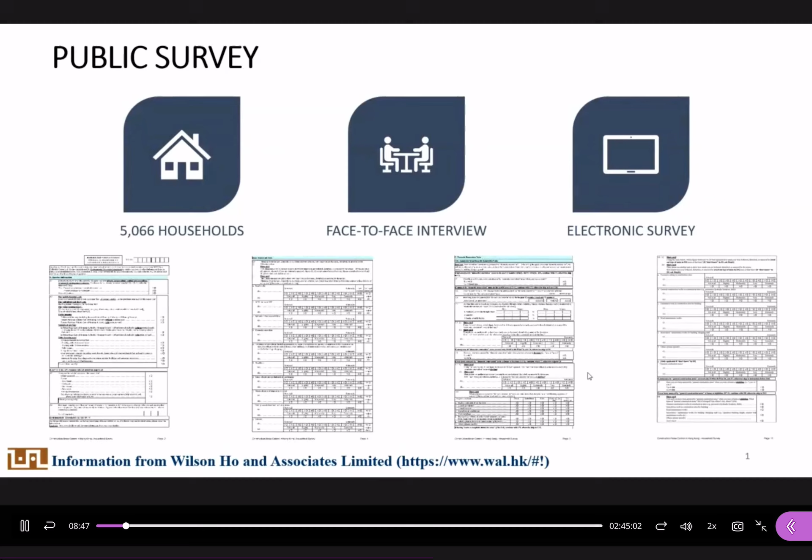Let's take a look at that. After their study, they found that noise is concentrated during the daytime, not even at night. Normally we make campaigns during the daytime, not at night.

And noise from domestic renovations is more annoying than general construction work. For general construction work, because we have stringent requirements to control the use of power equipment and the time durations we are allowed to use it, but for renovations, we don't have such stringent requirements.

If your neighbors want to do renovations at home, it is so annoying, and we want to control them. Normally they can do this from 9 o'clock in the morning up to 5 o'clock in the afternoon, so outside this period you are not allowed to do this, and it induces a large number of complaints. The final results found that the property management company could be a good channel to manage those renovation noise issues.

This is the comparison results - this is for domestic renovation and this is for general constructions. You can see the light green one is 'not annoyed'. When you refer to this pie chart, you can see that more than 60% could feel annoyance under domestic renovations, but compared to the same situation for general constructions, only 40%.

This chart shows the percentage of populations that could feel annoyance under construction noise effects, such as percussive piling and general site activities, road maintenance, demolitions - mainly during the daytime, not at nights. With the presence of property management, it is better to do control for domestic renovations, because when we receive complaints, this is a good channel for us to communicate with others. This is general information for your reference.

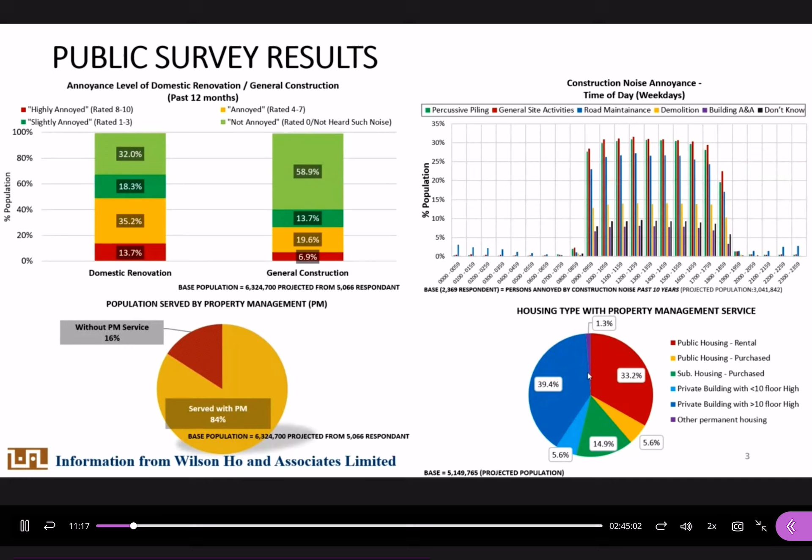If we have this noise permit, it means that we are allowed to do some construction activities. If we are not allowed to do so, it means that you cannot do that - it is illegal. We could not go through all the details about that.

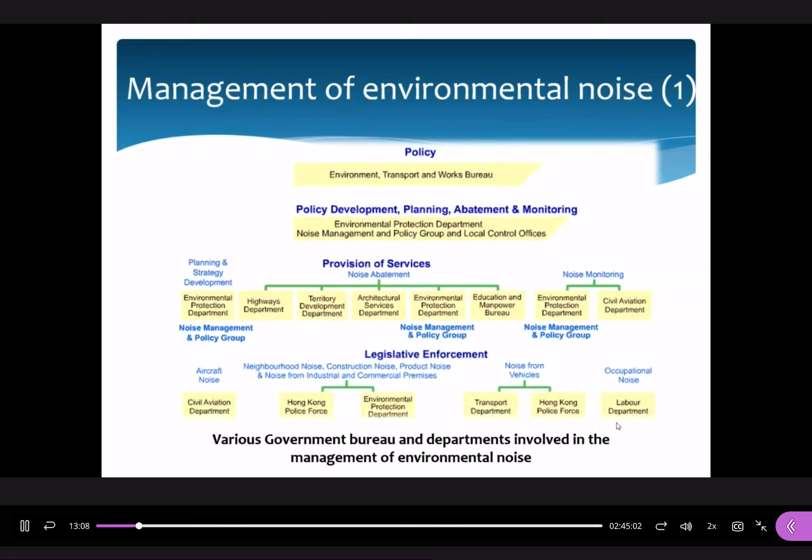I just want to share with you that in Hong Kong, normally we divide into two types. The first one is general construction work. In addition to that, we classify percussive piling work, and they have different requirements for general construction work and percussive piling work. In terms of the legislation, we could refer to the Noise Control Ordinance, Chapter 400.

Inside this document, there are many legal terms about how to define the noise effects and what kinds of legal requirements we need to follow.

In the descriptions of control, please pay attention when we want to use power mechanical equipment at night - from 7 o'clock in the evening to the next day, 7 o'clock in the morning, we need to submit our permits when we use this, when we want to use power mechanical equipment. But during the daytime, before this period, let's say at 5 o'clock in the afternoon, we do not need to apply for any permits to use the power mechanical equipment - just at night.

It is very stringent. We need to have very solid justifications, and we even need to provide very good provisions to reduce the noise effects. Otherwise, the authority EPD could not approve your applications.

And for the piling work, in terms of the piling work, we still refer to Chapter 400 Noise Control Ordinance. At night, it is not allowed - even if you submit an application to the authority, it is not allowed, it is prohibited. But in the daytime, when we want to apply to use these machines, we still need to apply for noise permits, and there are two different types. I will let you know the requirements later on.

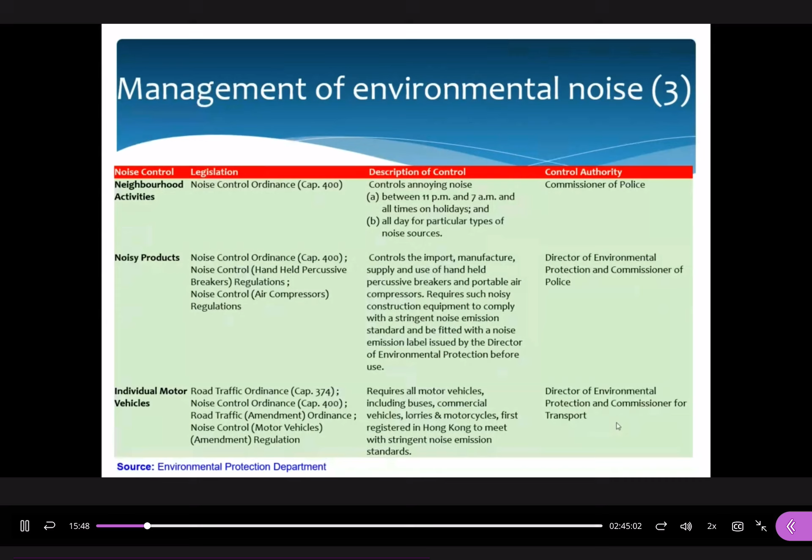In terms of the Noise Control Ordinance, it also refers to industrial and commercial activities, and laboring activities. For the neighbourhood activities, such as in the midnights, the control authority is the Commissioner of Police, not EPD. And the noisy products and individual motor vehicles, they have reference guidance.

And also the traffic management and intruder alarm system. For this one, intruder alarm system, what does it mean? It means those alarm systems inside buildings, for example, the fire alarm system - we have a specific sound level for this design. If the sound level is too low, it cannot alert people for evacuation in case of fire accidents. If the sound level is too high, it is not good. So that's why we have this one.

And the aircraft noise, it is regulated by the civil aviation department, not environmental protection department. For the BS standard, there are two parts: the first part is for noise and the second part is for vibrations. This document is the code of practice for noise and vibrations control, construction, and open sites.

There are some general control measures and suggestions at source. For example, we need to turn off unnecessary engines or switch off equipment where not required - it means we do not turn on all equipment at the same time - and keep internal haul routes well maintained and avoid steep gradients. This is to transfer materials inside construction sites, and use rubber linings in chutes and dumpers to reduce impact noise, minimize the drop heights of construction materials, and start up plant and vehicles sequentially rather than all together. When you refer to all these general requirements, there are some common sense.

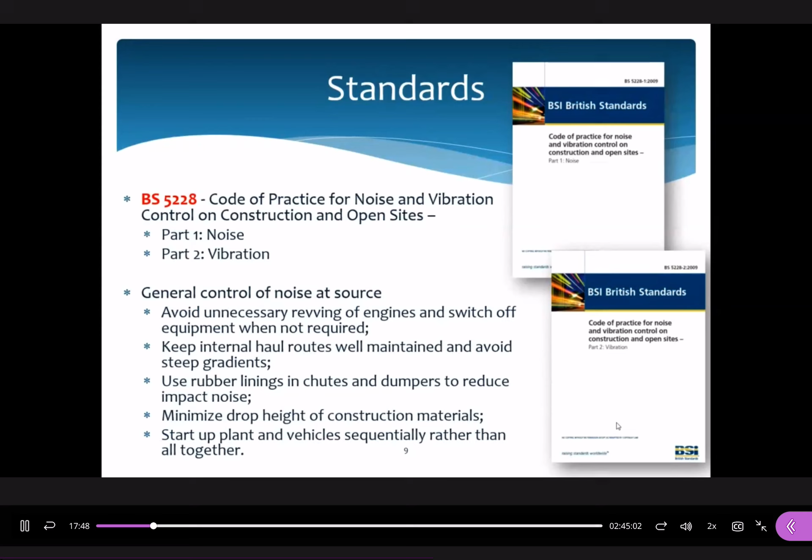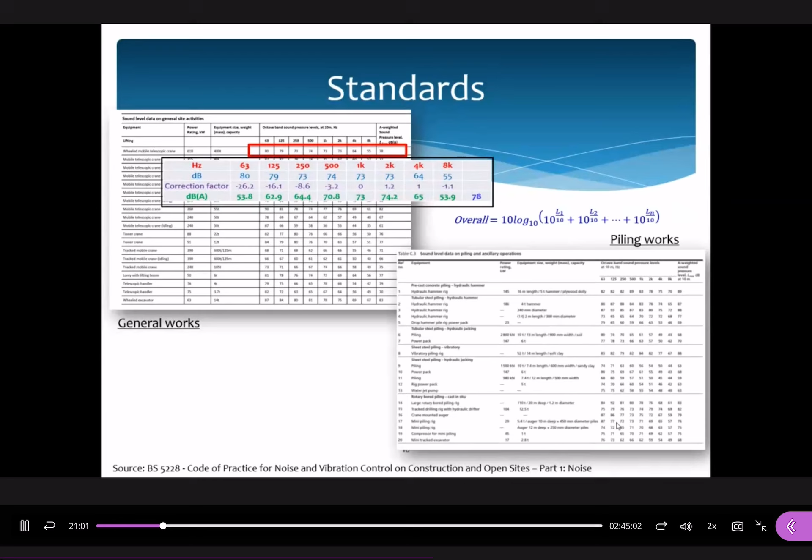When you refer to some similar guidelines, most of them present data in this form. Any problem about the calculations here?

Now another question for you. We have a question like this: we need to explain why a fabric of 0.3 millimeter thick with STC...

What does STC mean? Sound Transmission Class. STC 15 cannot be used to reduce noise from an operating machine in a construction site by 10 dB if the fabric is used as a barrier.

When you read through the question, what does it mean? It means we have a fabric, we use it as a barrier, and the fabric with STC 15 means that at 500 Hertz, the transmission loss of this material is 15 dB, correct?

Do you still remember how to find STC? This one, correct? In the lectures I explained how to find the STC, and even in your second lab you focused on finding the noise reduction index.

At 500 Hertz, we have a single rating here. Let's say STC 57. It means that for this material, you can reduce 57 dB at 500 Hertz.

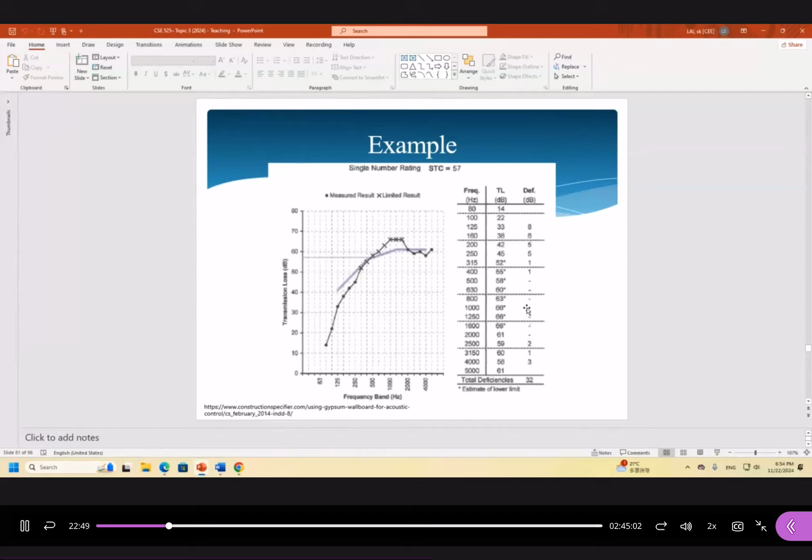Now the question here is that this fabric material can achieve STC 15, but the answer is that in reality we cannot use it to reduce 10 dB when we use it to cover or block the sound generated from these operating machines.

What is the possible reason for that? You may combine the basic principle of this and the data you observed in these two tables to answer this question.

Please read carefully about these two tables. Whether for general construction machines or power tools, what is the dominant effect? Low frequency, correct? Consider at 63 Hertz, the dB value is 80.

Although we apply the A-rating effects to this, in the first lecture I told you that even though we cannot hear or are not sensitive to low frequency noise, it doesn't mean it has no negative effects on us. So across the whole spectrum, the data in terms of dB at low frequency should be more pronounced than at high frequency, correct?

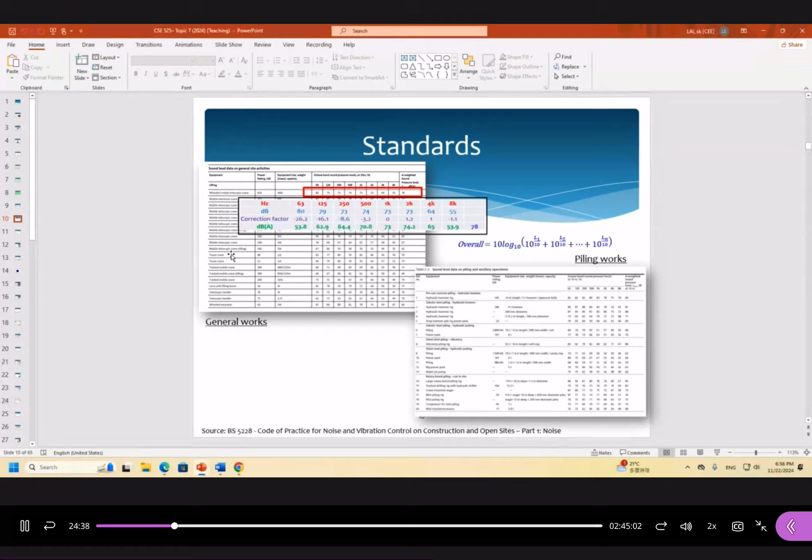The first answer is that an STC rating of 15 dB does not mean the transmission loss is 15 dB for all frequencies—only at 500 Hertz or above. The dominant frequency of construction machines is usually below 500 Hertz, so this rating cannot block low frequency noise effectively. That's why even if we apply this fabric as a barrier, it's possible we still cannot reduce the noise by 10 dB.

According to the STC definition, we can only ensure the effect at 500 Hertz or above reduces noise by 15 dB. Below 500 Hertz we are not sure we can achieve this. Since construction machines have dominant frequencies under 500 Hertz, this is the possible reason we cannot use this barrier to reduce construction noise by 10 dB in this case.

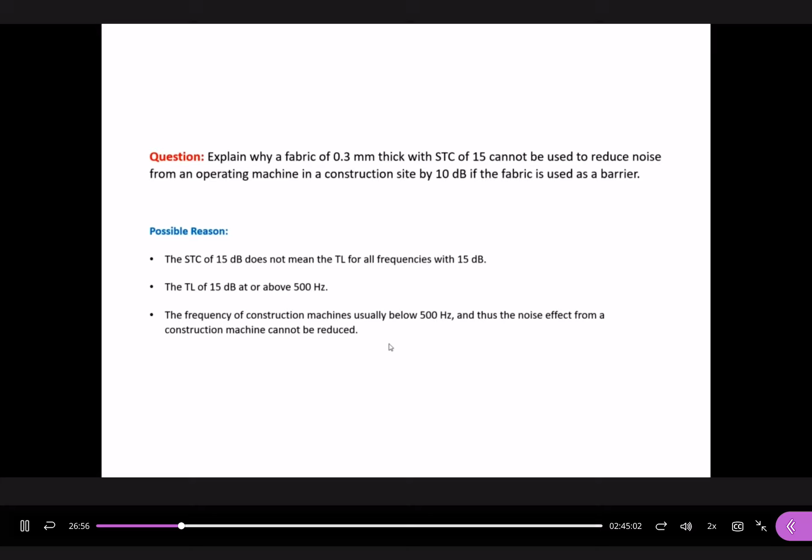Any problems about the explanations of this one? This is one of the past exam paper questions.

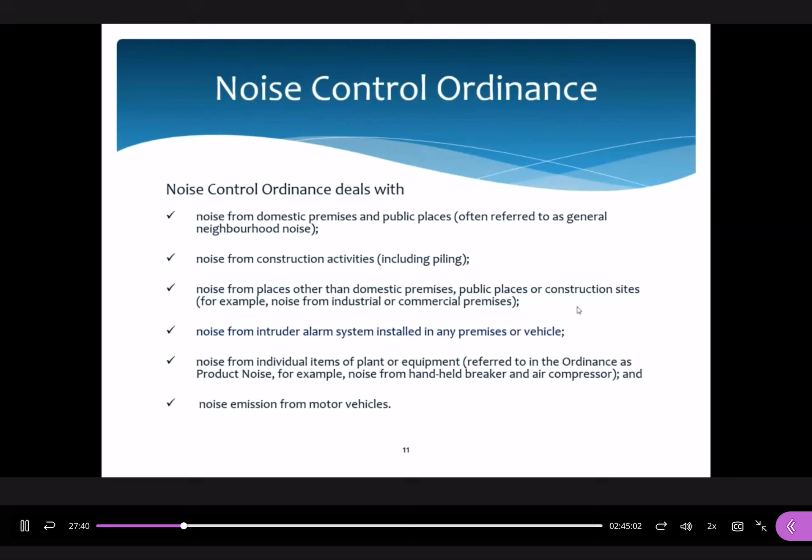Now back to this one. For the noise control ordinance, there are a total of 6 aspects, including noise from domestic premises or public places, construction activities including piling, intruder alarm systems installed in any premises or vehicles, and transportation vehicle noise effects, all of which fall under the noise control ordinance.

For airborne noise from construction activities, we group into two categories: general works such as excavation and concrete works, and percussive piling works such as using hydraulic hammers or drop hammers. Those relevant to piling works can be considered as these two types.

Potential ground-borne noise—when I talked about wave noise before, this is low frequency noise, a kind of structural-borne noise effect, sometimes called ground-borne noise. Even construction noise from tunnel boring or operations like railway services can generate ground-borne noise, which is a kind of regenerated noise inside buildings due to transmission of vibration energy. You may regard ground-borne noise as a kind of structural-borne noise.

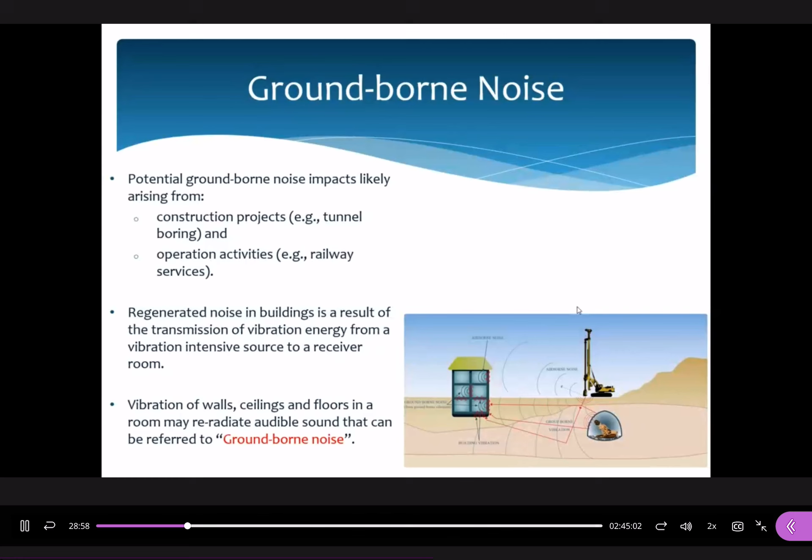This is the tunnel boring machine, or TBM—a tailor-made structure that we cannot reuse; every time we use this tailor-made structure to do excavations. Under the excavation of this one, you may regard this as an earthquake-like effect, and there are 3 different types of waves generated.

The first is the surface wave, traveling along the surface of the structure. The second is the shear wave, a kind of transverse wave. In earlier lectures I introduced that acoustic waves are mechanical waves with two forms: transverse wave and longitudinal wave. So under these excavation operations, we still have transverse and longitudinal waves, and in total 3 types of wave effects can be generated, as shown in this diagram.

This is an animation I extracted from available information. Some people call the compression wave the primary wave, and the transverse wave the secondary wave—referred to as P wave and S wave. Comparing speed, the P wave is faster than the S wave; you can see that under the same time instant, the distance of the P wave is farther away than the S wave, meaning its speed is faster.

But when you look at vibration amplitude, the S wave is higher than the P wave. This is why we have an alert system for earthquakes—we make use of the time delay to trigger the effect. We cannot predict the occurrence of an earthquake, but when we detect the presence of the P wave at lower amplitude, it means a seismic effect is coming, and we alert people to go to a safe place.

Because when you compare the vibration amplitudes, the S wave, the secondary wave, the transverse wave, is much stronger or higher than that of the P wave. So we use this one to generate the signal.

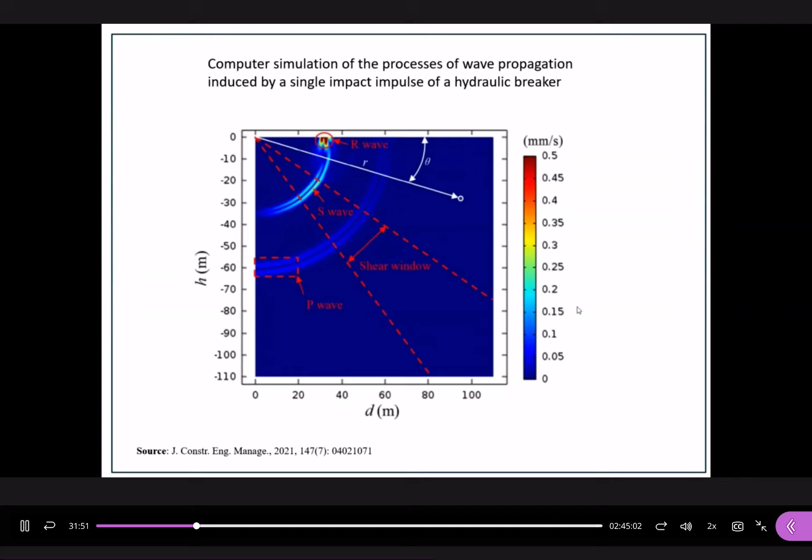Tunnel boring machines. We use these machines to do the tunnel boring. Normally, when we talk about tunnel boring machines, we could consider the effects of structural-borne noise rather than airborne noise, because it is under the ground surface, and we use it for explorations.

In the past, we used explosives or other different construction techniques to do such kinds of activities. But now we normally use this one for metro train service or underground tunnel construction works.

It is a machine used to excavate tunnels with a circular cross section, and the average working rate is 5 to 10 meters per day, and the length can be up to 100 to 150 meters.

Okay, let me show you a very short video about how the TBM works.

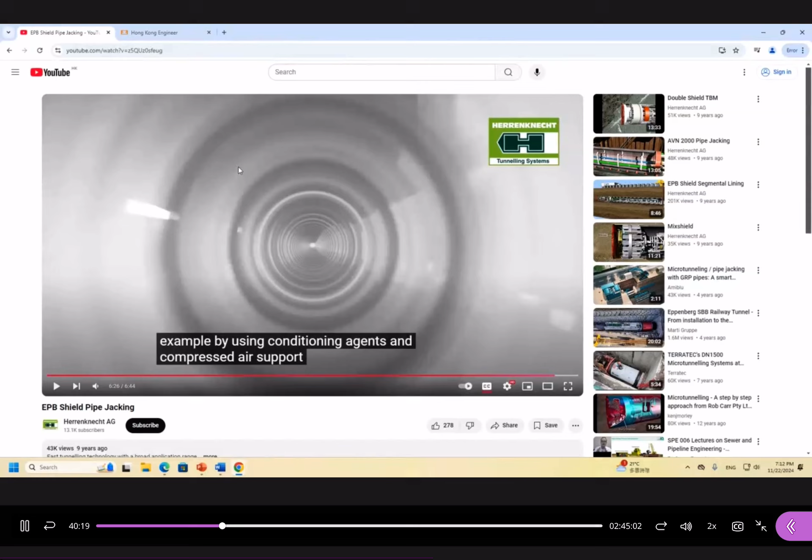In addition to the circular shape, originally the geometry of TBM is similar to a circular shape, but now we have some types of rectangular shapes like this. So we are not restricted to circular shape configurations only. It depends - we have different types of tailor-made structures.

In terms of TBM constructions, we may derive 4 types: open type, shielded type, earth pressure balance, and slurry type. I could not go through the details about this one because it is not relevant to the geotechnical subject. So I just want to let you know that in general we have 4 types, and what type we need to use depends on the geological properties or structures - whether this is hard rock or soft ground. If this is hard rock, normally we use the shielded type or the open type. Otherwise, for soft ground we may use another type. It depends on the geological properties of the structure.

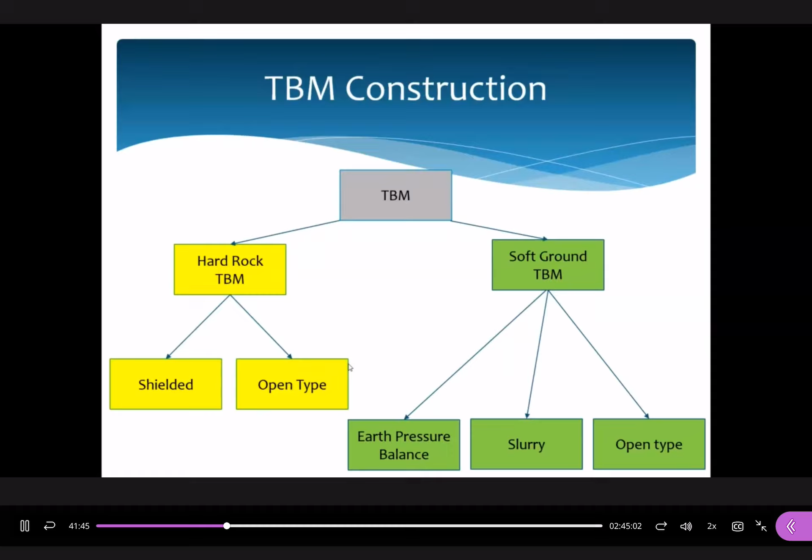Now, to measure ground-borne vibration, one key parameter is the vibration level. We call this PPV, and the unit is millimeter per second. When you look at this table, if the vibration level is just 0.14 millimeter per second, this is not very sensitive, it's just perceptible. But if it's up to 5, 10, or even 20 millimeter per second, damage should be applied on a building structure, because the vibration effect is very rigorous.

PPV is short for peak particle velocity. This is defined as the instantaneous maximum velocity that can be reached by vibrating elements. We use this one to assess the ground-borne vibration.

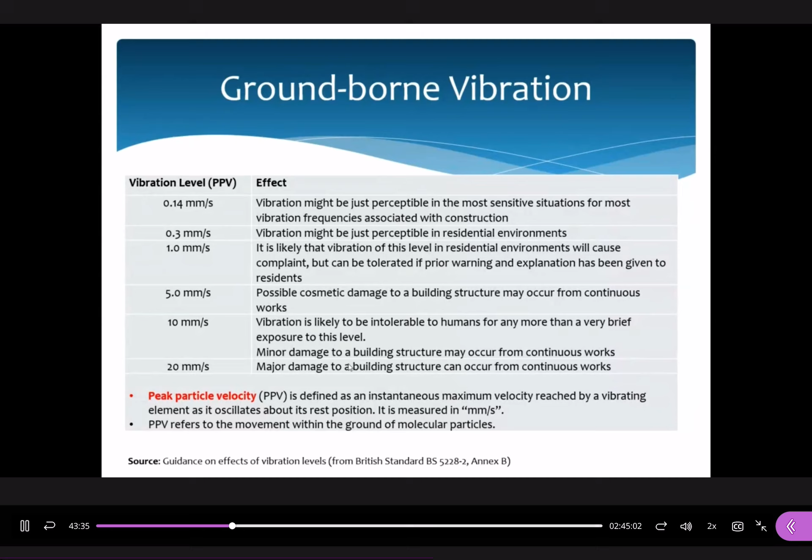Technical memoranda - to assess the noise effects, we have 4 technical memoranda. In the first lab, I shared with you one of them, to assess the tonal noise effects, and we still have the other 3. The other 3 are relevant to construction noise permits, and they are used to assess general construction works and percussive construction works.

Construction noise permits - this is a legal document that should be applied. The main contractor may submit relevant documents to the authority, here referring to the Environmental Protection Department, and the authority could follow those requirements presented in the technical memoranda to assess the effects. Within these documents, it contains technical principles that can be applied to determine whether or not permits should be issued, and under what conditions should be included in the permits.

We have 4 technical memoranda. We use this one to assess the effects of tonal noise.

We still have these 3 technical memoranda. The first one is the technical memorandum on noise from construction works other than percussive piling. The second one is for construction work in designated areas.

What does it mean, designated areas? Those are populated or urban areas, we call these designated areas. For example, if we have a construction site located adjacent to our campus in Tsim Sha Tsui, Hong Kong, we may consider the second one because our location is inside the designated area.

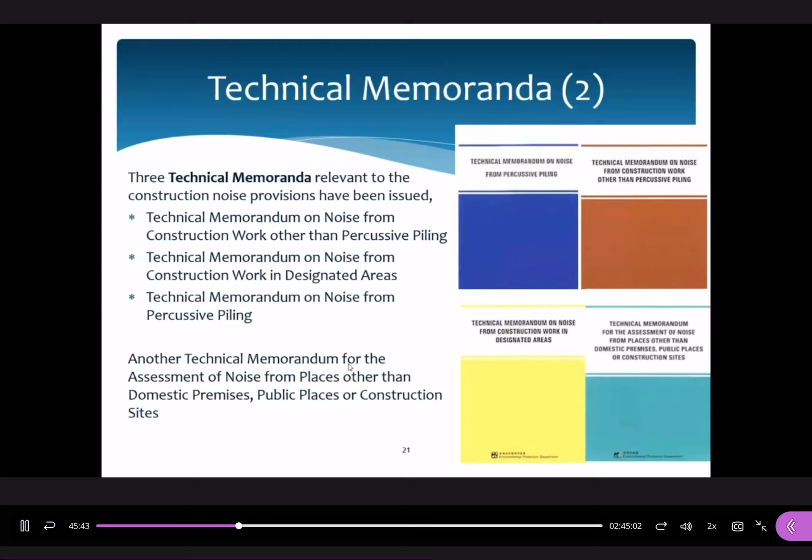The third one is the technical memorandum on noise from percussive piling. The last one I explained to you before, so we do not consider this one again.

In general, we just classify into 2 categories: the first is construction work other than percussive piling, and the other is from percussive piling.

What are the differences? Not only for construction activities but also for demolition works, we need to apply for noise permits, because demolition activities could create louder noise effects than normal construction activities. There are guidelines issued from the buildings department called the code of practice for demolition of buildings, and to do so, we need to apply for the noise permits.

Applications for construction noise permits have to be submitted to the authority at least 28 days before the proposed commencement of any works, to allow for processing. That means if you intend to do works for demolitions, you need to submit noise permits at least 28 days in advance.

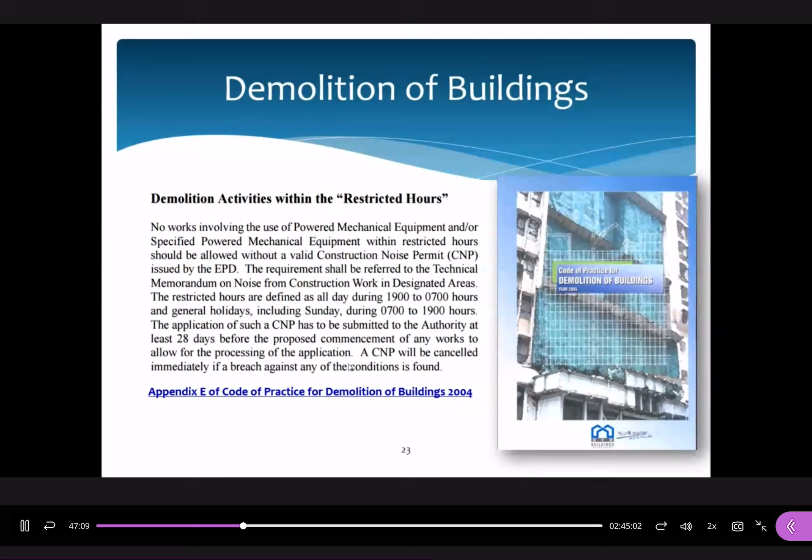To reduce the noise effects and dust effects when we conduct demolitions, some countries use specific techniques for doing this. Let me show you this one.

The first one is the HAT-down method, introduced in Japan. This HAT-down method uses giant jacks and electricity-generating cranes to reduce noise affecting the surrounding area. It can reduce noise by 17 to 23 dB. That's because all the construction work is done inside the building, so you can minimize the effects of dust.

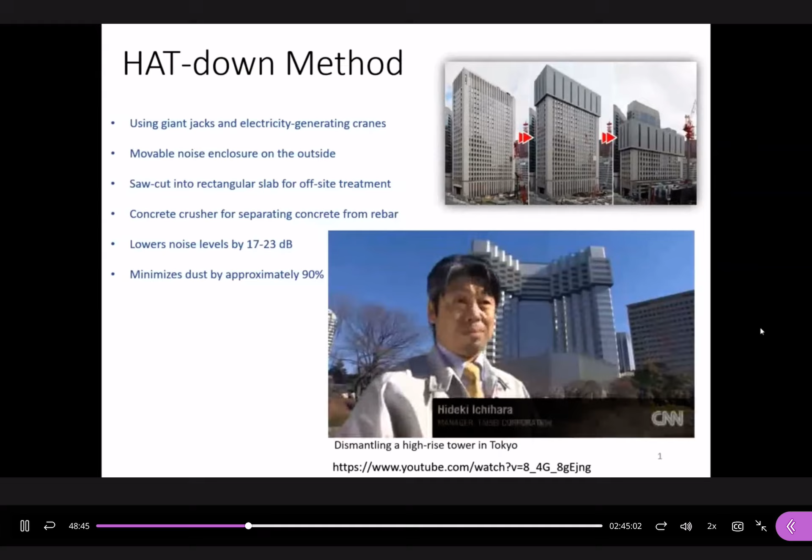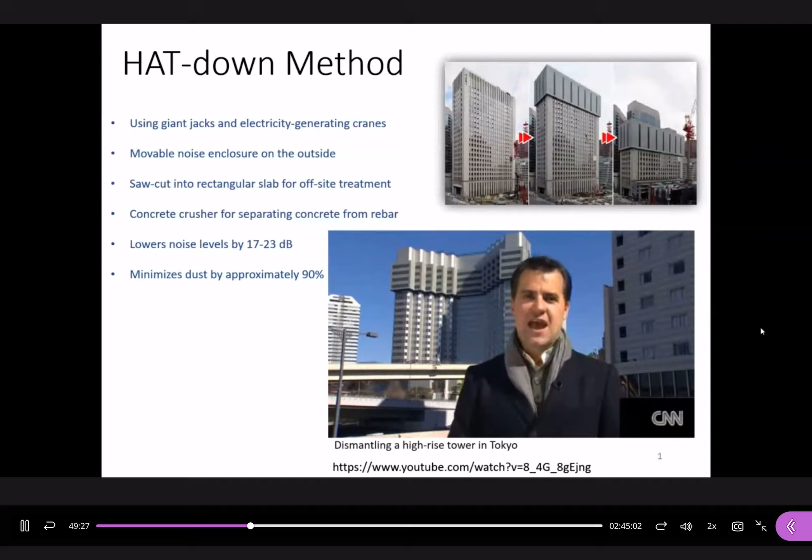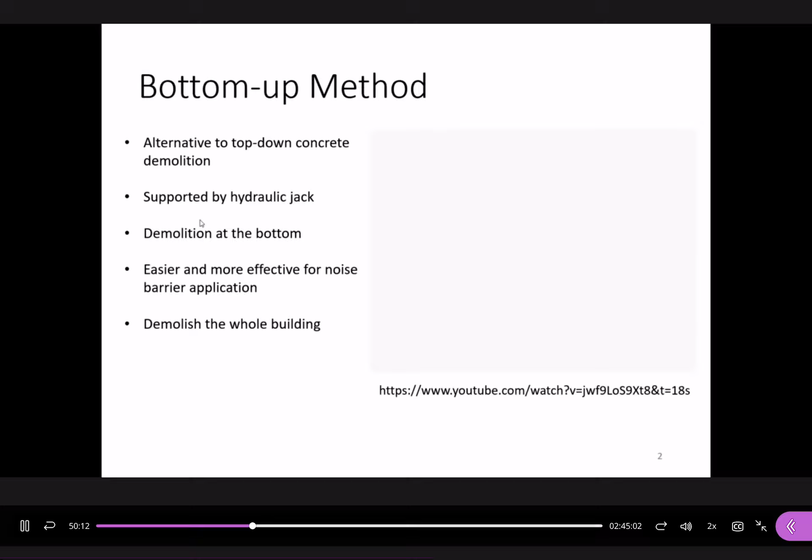Normally we do demolitions at the top of the building rather than at the bottom, but now we can make use of this bottom-up method to do this.

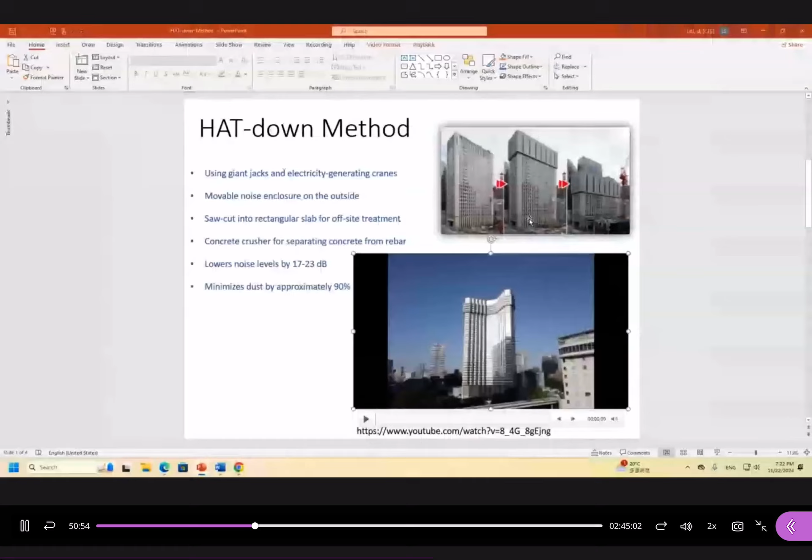Even if you make applications for that, the authorities could not approve your requests. So please pay attention to that.

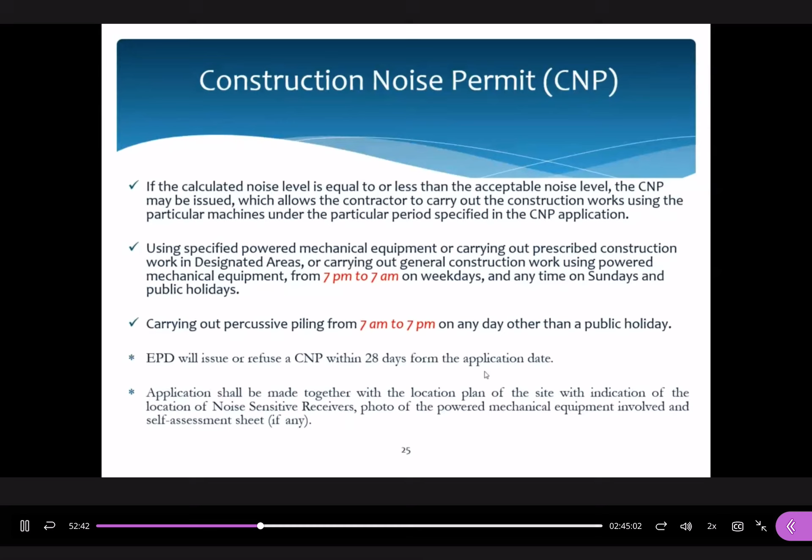The procedure normally takes 28 days to have the final results. When you submit the application, you need to submit the location plans and the numbers of machines you are proposing for use in this construction works, and what kind of surroundings the construction site has, including what are the noise sensitive receivers. You need to prepare a set of documents to the authority.

For construction works other than percussive works, we have a total of 13 procedures. This is just for the assessment procedures for construction works other than percussive works. When we consider the use of percussive piling, we could not follow these procedures - we have another set of procedures.

The first one, we need to locate the most affected noise sensitive receivers, NSR. What is NSR? For buildings such as domestic premises, hotels and hostels, educational institutions, hospitals and clinics - all of them we could classify as NSRs.

If there are no sensitive receivers surrounding the construction site, we don't care about this one - we don't care about the noise effects. This is the first assessment procedure.

Now let's say we have a construction site located surrounding us. We cannot classify the campus - our home campus is not in rural area, we must classify it as urban area. It is based on engineering practice, okay, or your judgment.

Whether this is not affected, indirectly affected, or directly affected depends on the real situation. This is the degree to which it is affected by IF. What is IF? Influencing factor - this is a short form.

The second procedure is the determination of the ASR, whether the type of area within which the NSR is located, such as rural area or urban area, and whether there are any other influencing factors, such as a traffic road located surrounding the construction site, an industrial area, or an airport located surrounding us. For the influencing factors, how do we define whether the traffic road makes significant contributions to NSR?

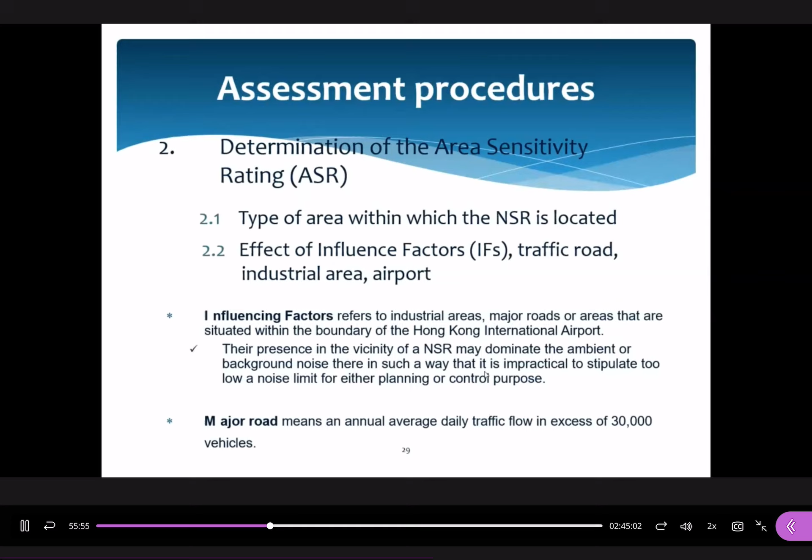If we consider a major road, if the traffic flow is more than 30,000 vehicles per day, we regard this as a major road. Less than that, we do not consider that there are any significant effects to the NSR.

And then we have some definitions about that. I just want to share with you these definitions, but when you read through all of this, sometimes it's difficult to understand how to define this one. It is based on the real situation.

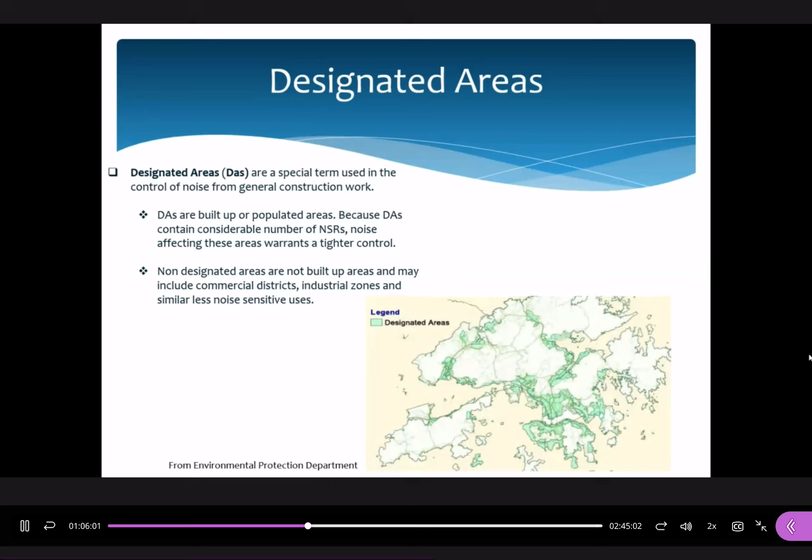Non-designated areas are those not built up areas, or may include commercial districts, industrial zones, or similar less noise sensitive uses. When we consider the surrounding NSR in urban areas, normally we take 100 meters radius around this NSR - that should be adequate. For rural areas, we need to consider within 500 meters.

And then you can select the worst case scenario. If the worst case scenario can fulfill the requirement, that means all other scenarios can also fulfill the requirements. This is a simple example here.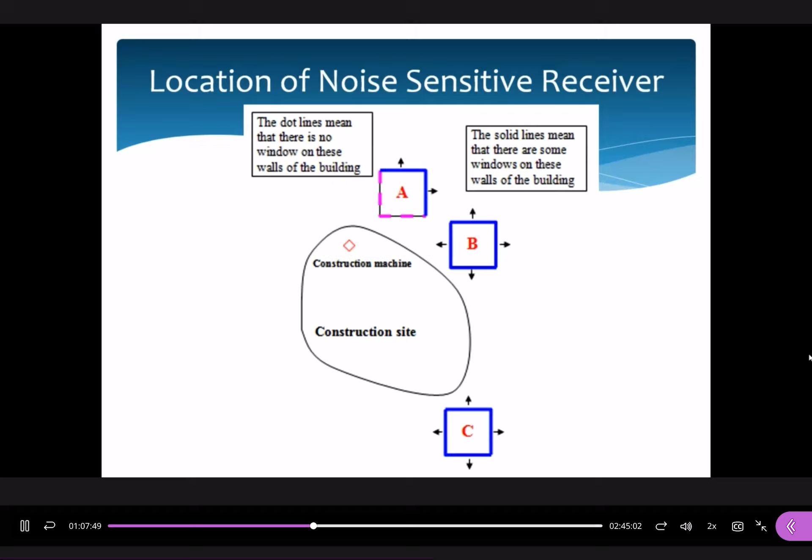The second one is the effect of the influencing factor. We have a newly built construction site here. If there is a road and the traffic flow of this major road is more than 300 vehicles, we need to classify this as a major road. Under the major road effect, we consider building B is directly affected. Remember we have a number of scenarios in this table, A, B, and C. How do we classify this? It depends on the degree to which it is affected by influencing factors.

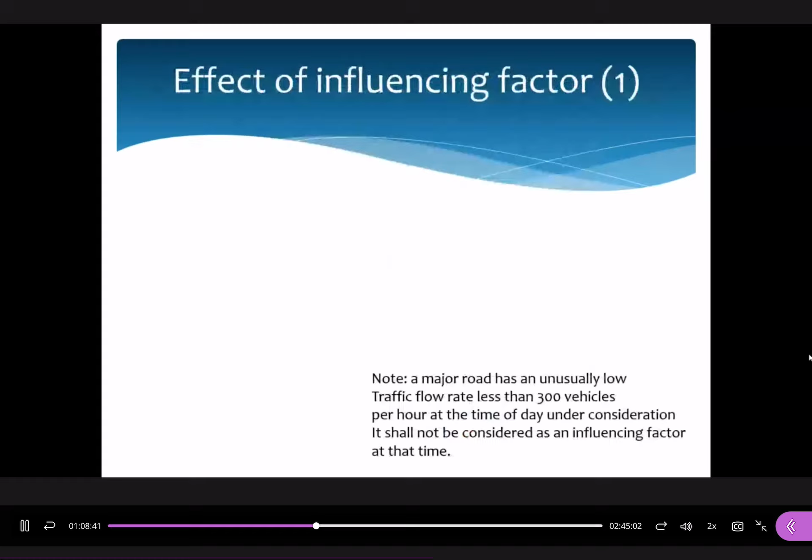On the other case, although we have a construction site here and building A on this direction, there are no windows, and the road here is less than 300 vehicles, we could consider that the influencing factor is indirectly affected in this case.

Why do we need to consider this? Because we need to consider table 2A or table 2B to find out the basic noise level. Table 2A is for non-designated areas, and table 2B is for designated areas. They're different.

Basic noise level, all day runs from seven o'clock in the evening to 11 o'clock in the evening. If we classify this as A, the basic noise level should be 60. In the midnight, this one should be up, the basic noise level is 45.

When you compare table 2A and table 2B under the same time duration, for A directly affected, this should be 45 only in table 2B, but this one should be 60 in table 2A. This one is 50, this one is 65. This one is 55, and this one is 70. What is the difference between them? The difference between them is 15 dB, correct?

Why should the basic noise level in designated areas be less than that of non-designated areas? Why do we have two tables, two different sets of requirements for non-designated and designated areas? Designated areas are often urban areas, correct? Whether we issue a noise permit or not depends on the basic noise level.

If we set the basic noise level lower, it means the requirements to fulfill the legal requirements are more stringent before the authority can issue noise permits to contractors. If we set the basic noise level too high, maybe more than 80, it is easiest to satisfy these conditions and then carry out the relevant activities. So the only difference between non-designated and designated areas is that urban areas need more stringent requirements, in such a way that the authority could issue noise permits to relevant works.

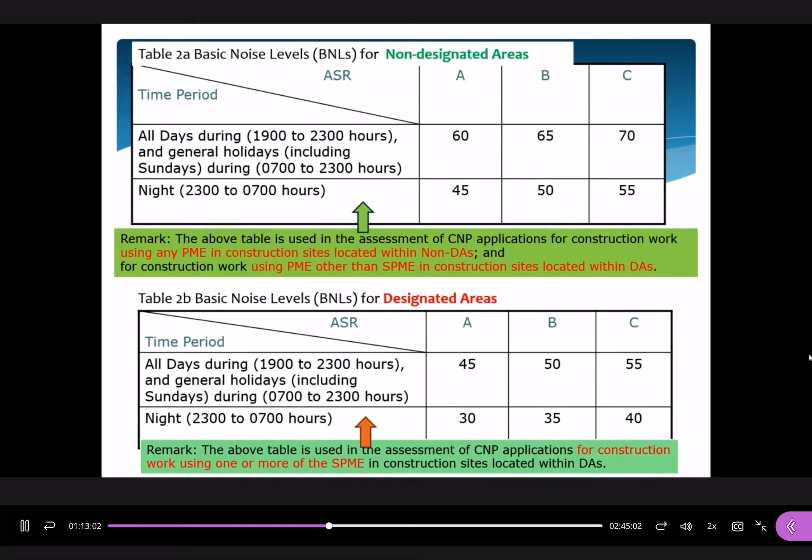For table 2B, another remark is that the above table is used in assessment of CNP for construction works using one or more SPME in construction sites located within DAs. I will let you know what SPME is later.

Let me explain to you from number 4 to number 6 first. Please go to this one. The acceptable noise level is equal to this equation only: ANL is acceptable noise level, BNL is the basic noise level.

Okay, so as I told you before, the difference between the non-designated and designated area BNL is 15. So in urban areas, the lower the basic noise level, the lower the acceptable noise level. That's why the requirements in urban areas are more stringent than those in non-designated areas.

We have two other parameters. The first one is CP. What is CP? This is the correction for permit duration. It means that if the work is not more than or equal to 14 days, CP is equal to 3 dBA. It means they give you a bonus - the higher the level, the easier we can achieve the requirements. So if it is not more than 14 days, CP is equal to 3 dBA.

How about CM, the multiple site situation? Let's say this is NSR. Now we already have two existing sites, and they are working together. Now we have a new application site. We still need to consider the negative impacts for these two existing sites. The authority could make corrections to the basic noise level based on the real situations.

How do we do this? We just make use of standard acoustic principles to do analysis, and the range is normally -1 to -7 dBA corrections. This is the typical range.

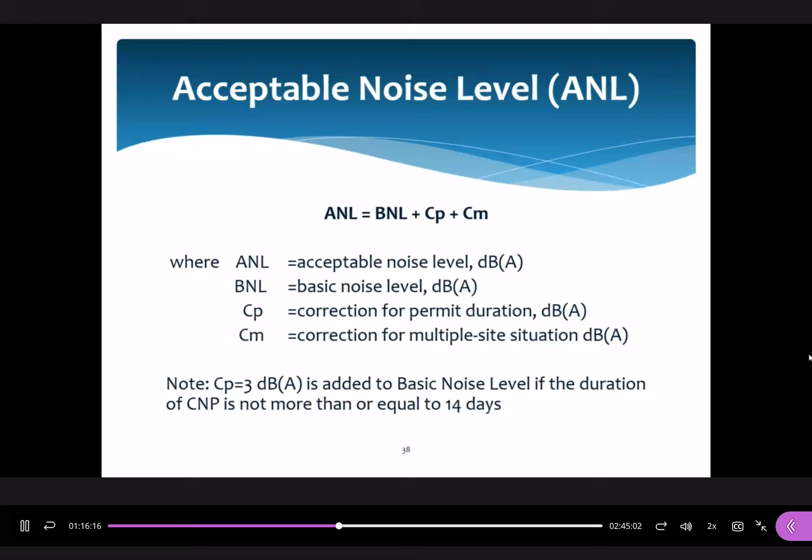So BNL is selected from table 2A or table 2B. CP depends on the time duration for your work, and CM is the correction for multiple sites situation - whether there are more than one construction sites working together. So you just add up all these three parameters together and you can get the acceptable noise level. So far, you can complete the assessment procedure number 1 to 6.

Now for procedure number 7 to 12, the first one is the locations of items of powered mechanical equipment. It means that you need to prepare a full list of mechanical equipment you could use on your construction sites for your construction works, so they could base on this to do assessments.

The second one is sound power levels for the items of PME. They have a list to show the sound power levels for this PME, and the distance attenuations, corrections of barrier effects, corrections of acoustic reflections, and then they find out the corrected noise level.

Based on the requirements, they could issue a noise permit or not - they compare the values ANL and CNL. If CNL is less than the acceptable noise level, it means the noise permit can be issued. If the corrected noise level is more than the acceptable noise level, the permit could not be issued, meaning you cannot conduct the relevant works, until you can share information to support that the corrected noise level is less than the acceptable noise level.

So you may regard there are two parts. The first part is to find out the ANL, based on these three parameters. For the second part, we need to assess the effects of the powered mechanical equipment.

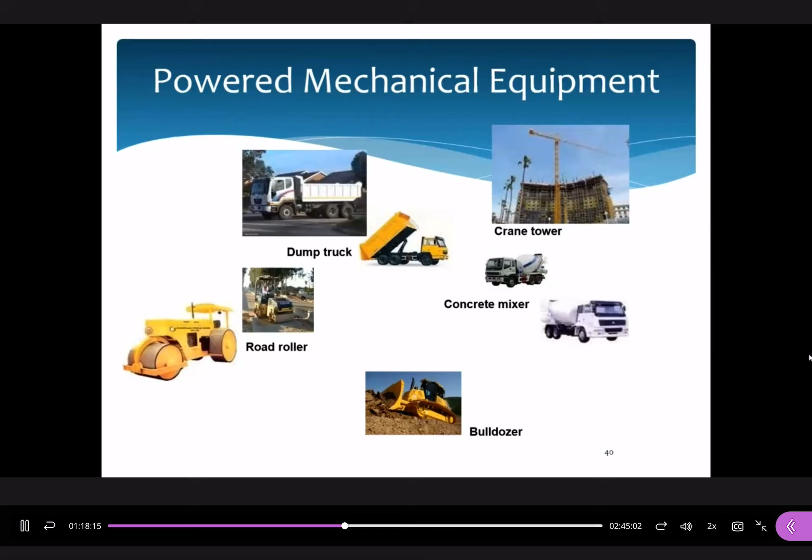All of them I show here, such as the concrete mixer, dump truck, and road roller - all of these we could divide as powered mechanical equipment. According to the technical memorandum, they have this table.

Some equipment could be considered specified powered mechanical equipment, such as handheld breaker, bulldozer, concrete lorry mixer, handheld vibration poker. All of these could be considered SPME.

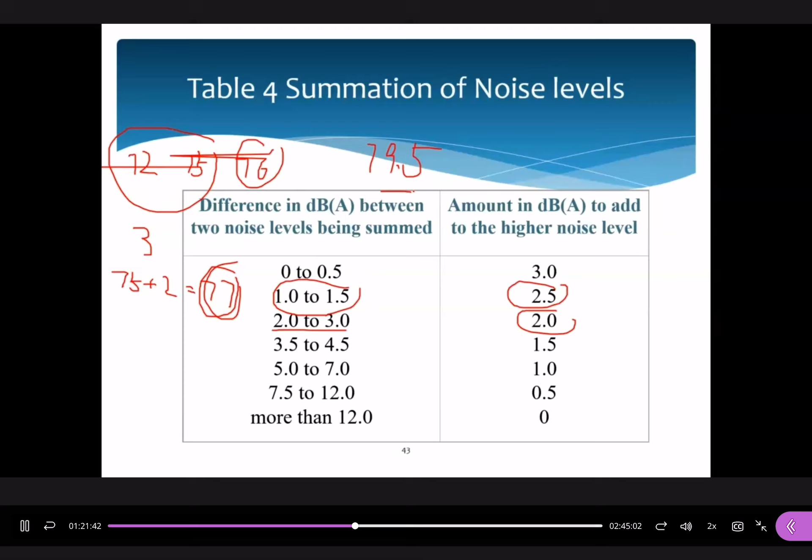Now let's take an example. We have two machines: one is CNP023 and the other is CNP030. One is 15 meters away from this NSR and the other is 20 meters away from this NSR. How do we consider this effect?

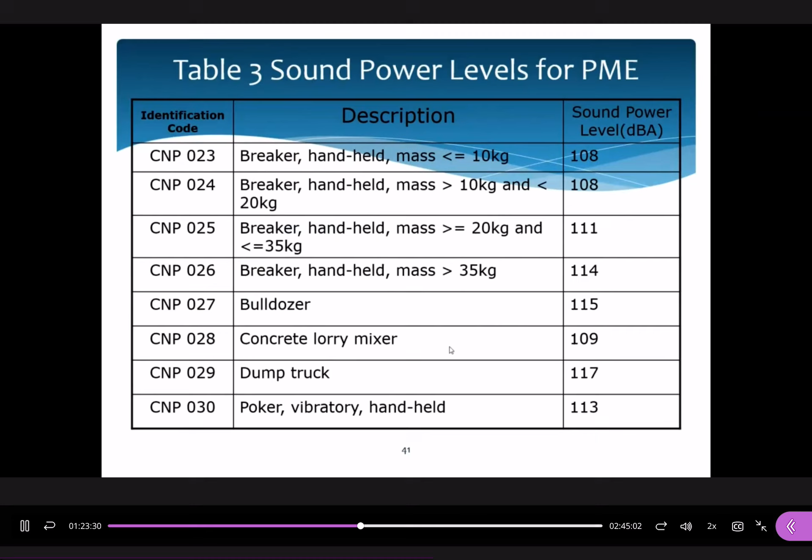We have two machines: the first one is the breaker, and the second one is the poker. Please bear in mind, the sound power level for the first one is 108 dBA and the last one is 113 dBA. When you refer to this, the separation distance, one is 15 meters, so the correction factor is minus 32, and the second one is 20 meters away from the NSR, so the correction factor is minus 34.

So the predicted noise level based on tables 3 and 5: for CNP023, the sound power level is 108 minus 32, giving the sound pressure level of 76 dBA. For the second machine, CNP030, the sound power level reference to table 3 is 113, and table 5 gives the separation distance correction factor of minus 34, so the correction is 79 dBA.

What is the total level? You just need to compare the difference between these two. When you compare, the difference is 3 dBA. Reference to this table, the correction factor is 2. So the predicted noise level at NSR is 81 dBA. This is the total one.

We just follow table number 3 to number 5. We don't need to do any calculations. Any problem about this one?

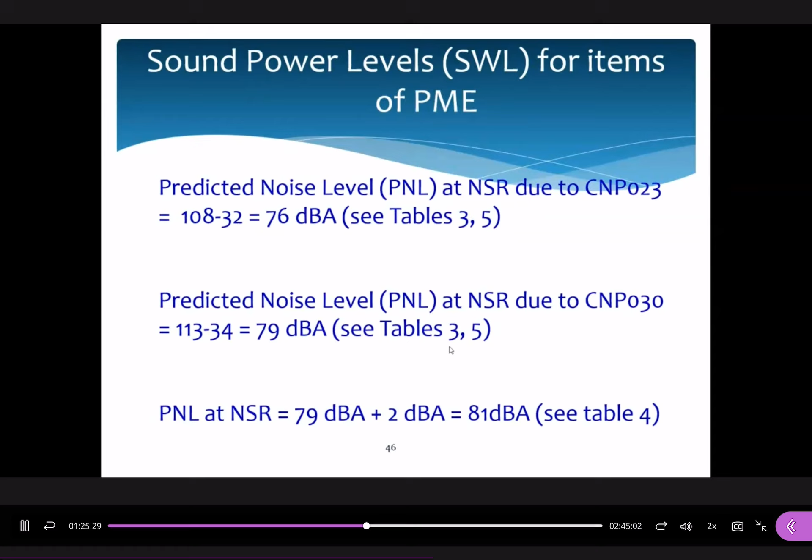And the final one is the correction applied to PNL, because you know that no matter for road traffic noise, railway traffic noise, or even construction noise, the assessment point is 1 meter away from building facades. That's because the building facade is a hard, reflective surface. So they propose using positive 3 dBA as a correction factor. For road traffic noise and railway traffic noise calculations, they propose using 2.5 dBA. But whether you use 2.5 or 3 dBA, it is very similar.

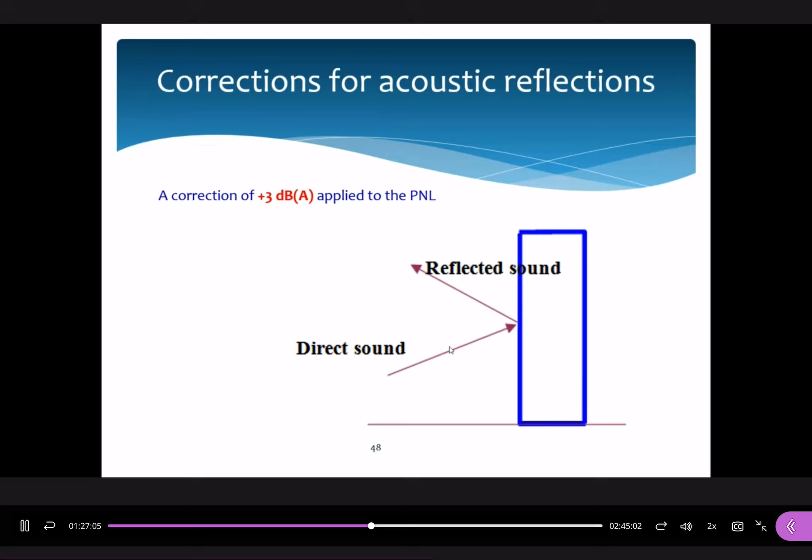Let us go to this one first. How do we find this? How do we get the distance corrections like this equation? R is the distance between the source and the receiver.

When we put our machines on the ground, we need to consider the directivity factor. Still remember what the directivity factor is? It can only radiate sound fields in a hemispherical form, correct? If we suspend the source and consider it a point source, it can radiate in all directions. But if we consider this a hemisphere, the surface area becomes 2 pi r squared, not 4 pi r squared.

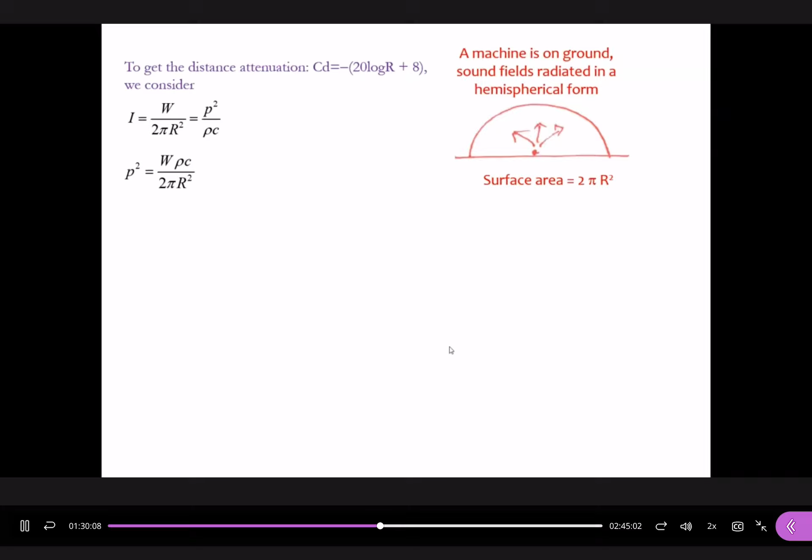So based on that, I equals power divided by surface area, which equals P squared over rho c. I derived this mathematically for you step by step before, so when you follow the steps here, we can get the final result.

Please pay attention to this term. This term is very small, very small. We can ignore this one.

You can substitute W reference equals 1 times 10 to the power minus 12, and P reference is 20 times 10 to the power minus 6, with rho as the density and c as the speed of sound. When you put all these four values into this term, it is approximately equal to 0.

Some reference books do take care of this term, but most of them just ignore it. So we have the standard form for the sound pressure level. This is for sound power level, and this one we can rewrite like this.

So this is the distance attenuation connecting the sound power level and sound pressure level. We regard this as the distance attenuation correction. But please pay attention here: this assumes we put our machines on the floor and the directivity factor equals 2.

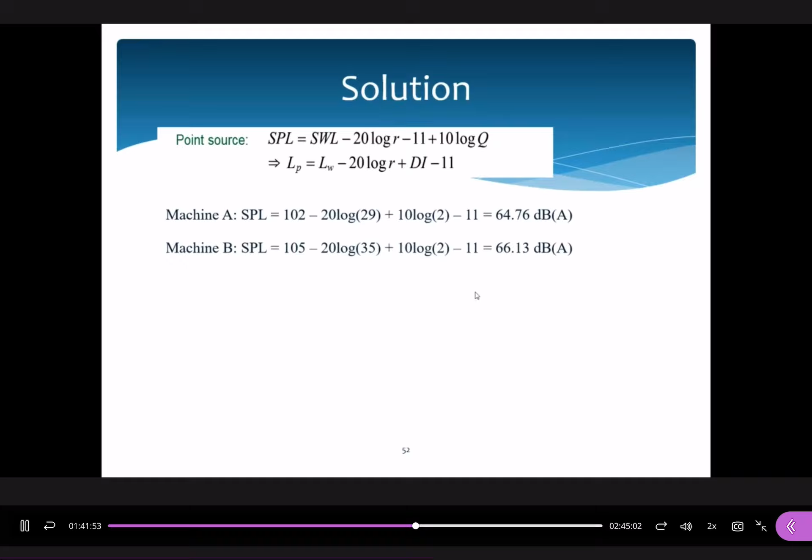Please pay attention, this is just an individual sound pressure level for each machine. How about the overall equivalence level at the receiver? At the receiver, we need to consider the operation hours for each one. For the first type, it operates for 4 hours. For the second type, it operates for 1.8 hours. Because I requested you to find the 8-hour A-weighted equivalence level, T here should equal 8 hours. So this is the equivalence level, 63.84 dBA. This is the standard equation.

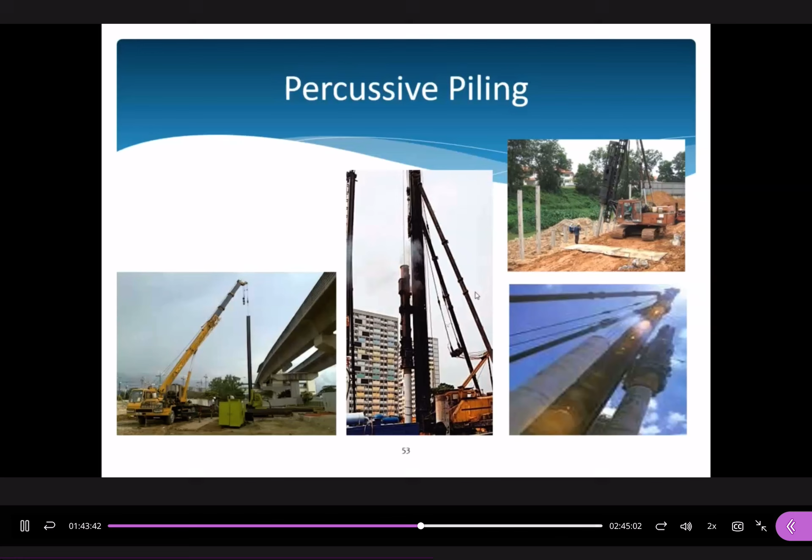Okay, let's move on. The second one, we completed the assessment procedures for general construction works. How about the second one, the percussive piling? Piling works is more intensive with short duration force, and it could create higher intensity noise effects. Compared with the previous technical memorandum, the assessment procedure for percussive piling has only 10 procedures, instead of 13. The first two are the same: first, find the location of the most sensitive receiver; second, determine the ANL. From 3 to 9, let's take them one by one.

Take a look. The third procedure is sound power level for percussive piling. The third one is summation of noise level, distance, and attenuations. Then you go to number 9. Number 9 is different, it's specifically for the assessment procedure for piling work. This is to determine the permitted hours of operation. What does it mean? Let's take a look.

To find out the ANL, we may refer to table 6. Table 6 is the acceptable noise levels for percussive piling. It depends on whether the NSR has no windows or other openings. If there are no windows or other openings, the ANL can be up to 100 dBA. If with central air conditioning systems, the ANL should be 90. Similar to this example, we have a central air conditioning system installed, so that's why the acceptable noise level is 90.

And if the NSR has windows or other openings but without central air conditioning system, the ANL should be 85. But there is a remark here: ANL should be reduced by 10 dBA for hospitals, medical clinics, educational institutions, courts of law, or other NSR considered particularly sensitive to noise. Take a sample here for this room: we have central air conditioning system, but the purpose of this one is for educational purpose, so the ANL is 90 minus 10. It should be 80 only.

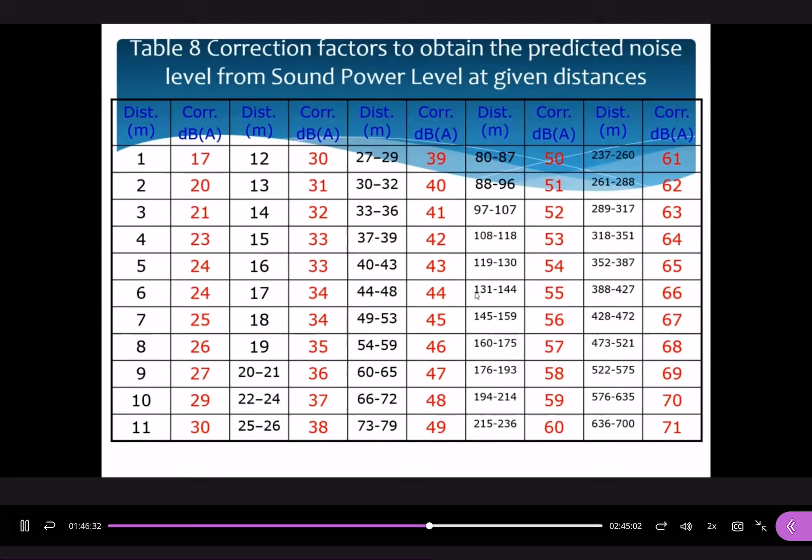Table number 7 is sound power levels for the percussive piling. We have diesel hammers, drop hammers, hydraulic hammers, and pneumatic hammers. Table number 8 is correction factors for predicted noise level due to distance and attenuations. Please pay attention, all the data presented in red color here are negative values, but table number 8 is not the same as table number 5. Not the same as table number 5. When you compare these two tables, the data presented here are different.

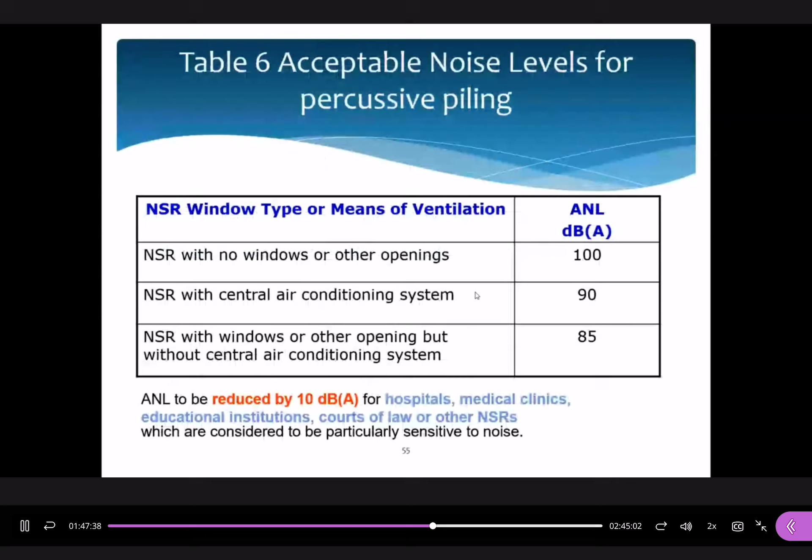We can use this equation to find the correction factors for table number 5 only, not for table number 8. For table number 8, we cannot just consider this as a simple point source, because this is piling work, different from general construction work. So this equation, 20 log R plus 8, is just for table number 5. Please do not use this equation to find the data presented in table number 8, okay? They are different.

Okay, table number 9A, please pay attention here. This is the permitted hours of carrying out piling works not involving the use of diesel, pneumatic, or steam hammer. What does it mean?

When we use piling types, such as the diesel hammer, drop hammer, hydraulic hammer, or pneumatic or steam hammers - if we just consider the drop hammers here, such as steel sheet pile, we refer to table number 9A. You can see that if CNL minus ANL is more than 10 dBA, we can only allow piling works in this time period.

If CNL minus ANL is less than 0 dBA, we are allowed to do piling work from seven o'clock in the morning to seven o'clock in the evening. If we fulfill the conditions here, we are allowed these time periods within 5 hours. If we satisfy these conditions only, we are allowed 3 hours only. It depends on the conditions here.

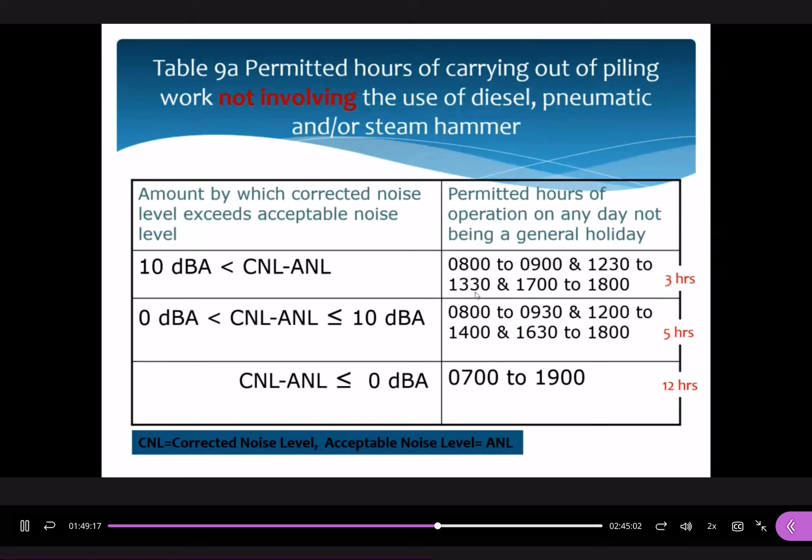We still have one more table, table 9B. This one is for the use of diesel, pneumatic, or steam hammer. If we use this type, we follow these two conditions. You may rearrange this one

for easy reference. You may rearrange this one: if ANL minus CNL is less than 10 dBA, you put the right hand side to the left hand side, and the minus 10 dBA you put from the left hand side to the right hand side. It's easier for our reference.

If ANL minus CNL is less than 10 dBA, you are not allowed to do so. If ANL minus CNL is more than or equal to 10 dBA, we are allowed to do relevant piling works during the time periods here. You may rearrange the sequence here for easy reference.

So there are two tables, table number 9A and 9B. It depends on what types of piling equipment you're going to use to reduce the noise effects.

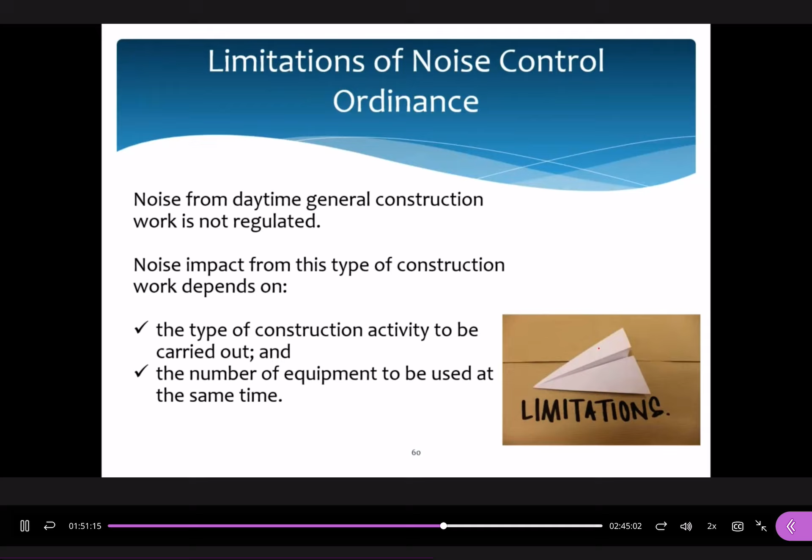And the limitations of the noise control ordinance: during daytime, we do not need to apply for noise permits, so that limits the types of construction activities to be carried out and the number of equipment to be used at the same time. These are the limitations under the existing control ordinance regarding noise effects.

Some people propose the use of quiet equipment. I will show you some videos before the end of this lecture about how to reduce the noise effects.

This one is... not this one. This is the magnetic tuned mass damper. It is used to reduce the piling work machine noise.

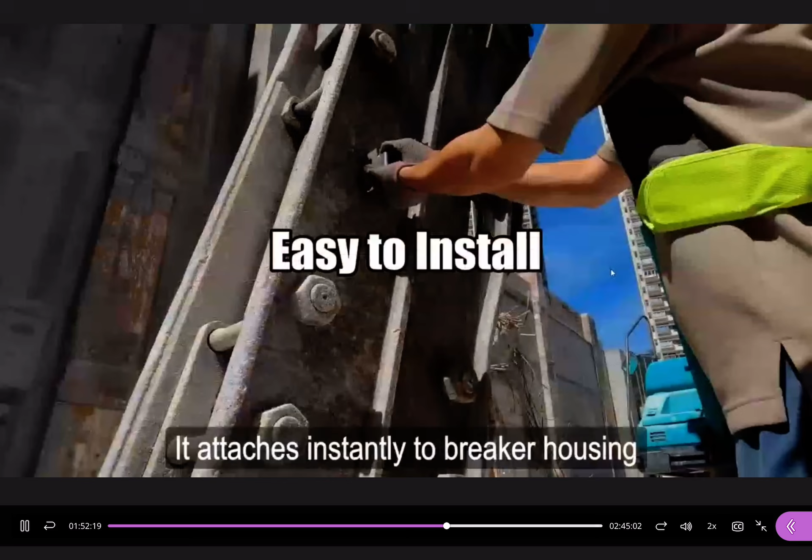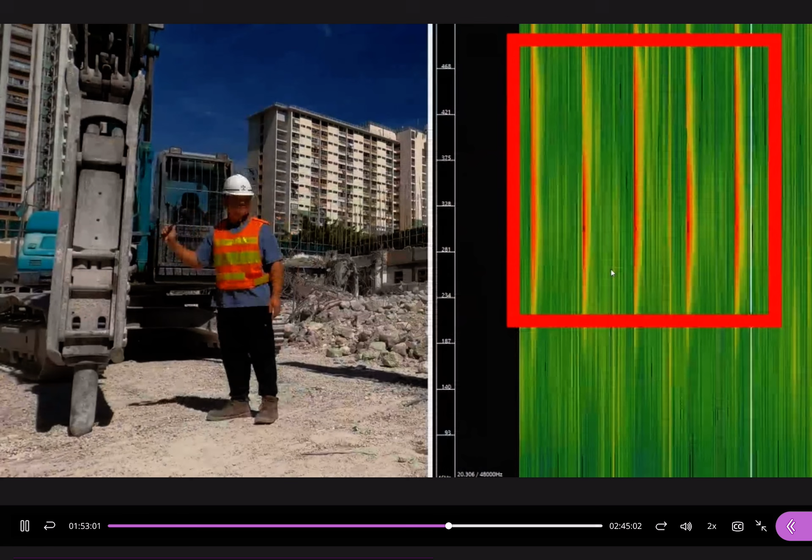This one is without the installation of a tuned mass damper. This one has the tuned mass damper attached on this piling machine. This one is to use the tuned mass damper attached on the piling machines.

Tuned mass damper - we apply this in different areas. For example, in buildings you can find tuned mass dampers such as in Shanghai Tower, such as in Taipei 101 building, or even we apply these technologies a lot to construct wind dampers.

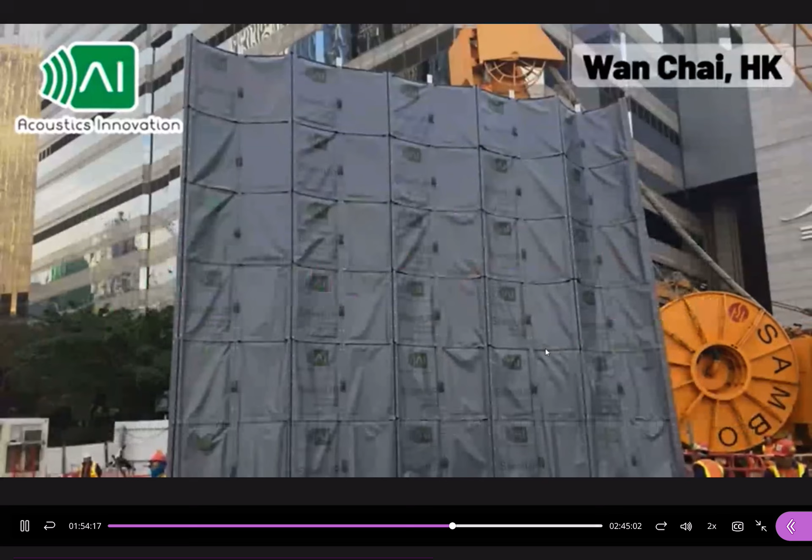And the other one is the retractable barrier. In construction sites, normally we cannot build a permanent structure surrounding them, so retractable and movable barriers are more effective for use.

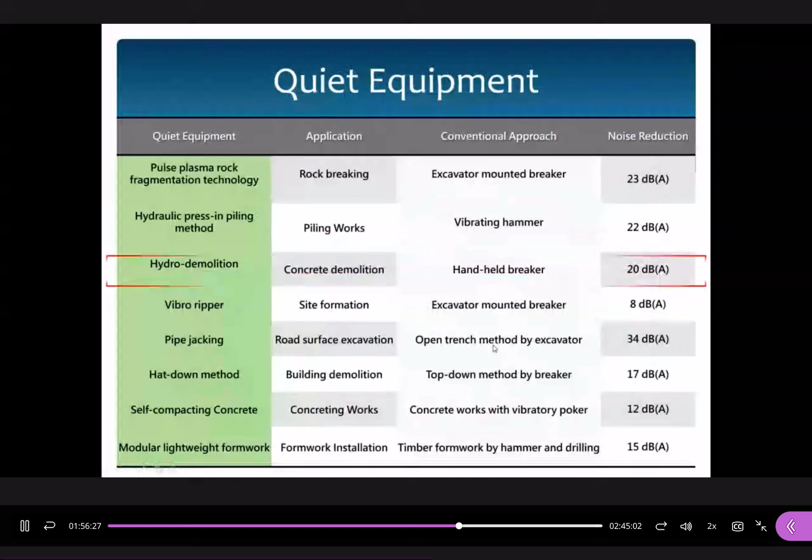Let's go back to this one. I just listed out some of the quiet equipment for your reference here. We still have other quiet construction methods, such as using the acoustic enclosure, specific design noise enclosure, and hydraulic pulse hammers that can reduce 2 to 9 dBA as compared to other traditional pulse hammers. This one is the retractable barrier I presented to you in this video.

If you are interested, you can take a look at the product specifications about that. This is the end of this topic. After the break, we could go to this tutorial.

This tutorial is still about road traffic noise. Before the break, let me show an example first. You can see that there are two segments here, segment 1 and segment 2. We want to find out the effects from segment 1 and segment 2 contributed to this receiver. We know that we can calculate this according to the calculations of road traffic noise.

We understand that the direct distance between segment 1 and R is this one, correct? But for segment 2, we cannot identify the direct distance from this one to R. The road must be parallel with respect to R. So how do we handle these scenarios?

They propose creating two imaginary receivers, A and B. Both A and B are not real, just R is real. But when we encounter these situations, we need to apply the principles of road traffic noise calculation, we create this A and B.

We first calculate A and B and then take an average of these two levels. We can find out the values of R.

For segment 1, the contribution to R to A, this is the first angle, 132 degrees. Segment 2 to A is 12 degrees. For the second one, segment 1 to B is 93 degrees. The contribution from segment 2 to receiver B is 27 degrees.

Okay, you follow the same procedure I presented in the last lecture, and then you can solve the problem. Let's have a break first.

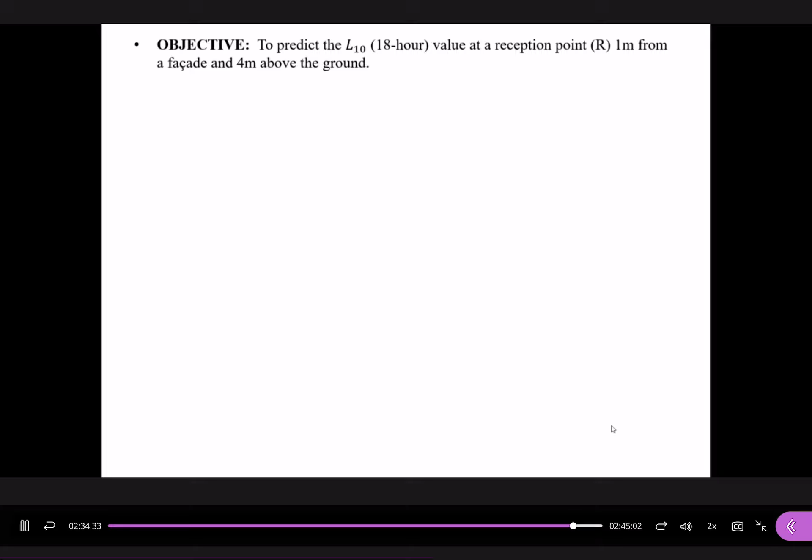The second one, according to the documents, because the road is curved and approximately has 2 segments, that's why we need to divide into two segments. The information here I just copied from the documents. The basic noise level, the speed limit in this case, is 50 km per hour.

There is no road gradient, so no adjustment delta V is needed. If there is a gradient, we need to consider delta V here. This is just to consider upward flow; for downward flow, we do not need to consider this one.

And the road surface is imperfect, and a surface correction is required as the traffic speed is less than 75 km per hour. So we list out this table. How do we read this one?

This is for segment A. This is for reception point A, reception point B. Because both segment 1 and segment 2 could make contributions to reception point A and B, you need to calculate one by one.

The traffic flow, according to the information here, is 9,500 vehicles per day, under the durations here. So, referencing chart number 3, you can calculate the basic noise level - this is it.

Okay, all of them are the same because all the traffic flow is the same coursing through these two segments. The second factor is the traffic speed. Both of them are 50 km per hour. So referring to chart number 4, the correction factor is 0.2 dBA under a percentage of heavy vehicles of 10%, and there is no road gradient, so we do not need to consider delta V.

How about gradient? The gradient percentage is 0, so the correction factor referencing chart number 6 is 0, and the road surface imperfection correction is -1 dBA. Okay, you can see this one.

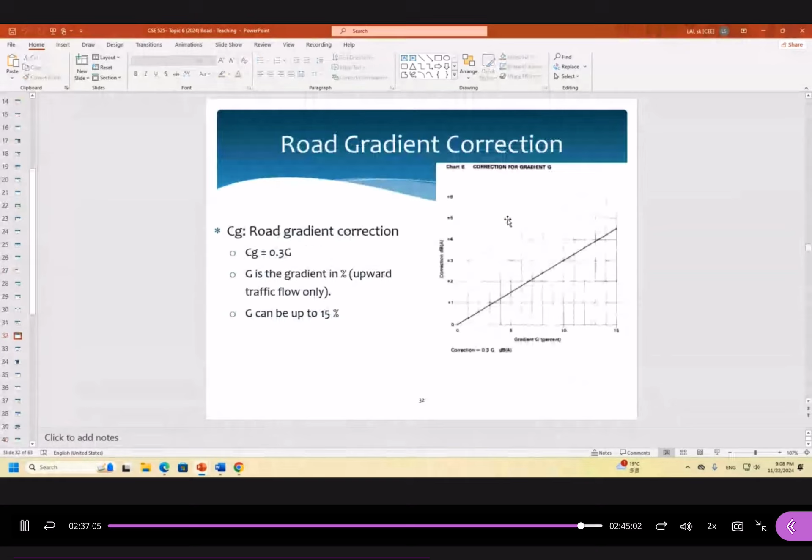The first one, if the speed is less than 75 km per hour, the correction factor is -1 dBA. Okay, and then you add all of them together.

In this case, referring to the first two stages to find out the basic noise level, all of them are the same under the same traffic flow, same traffic speed, and same percentage of heavy vehicles. How about the third stage?

The third stage is the propagation effects. Please pay attention here. The shortest distance between segment 1 to A should be 27.5 plus 3.5. You may refer to this figure. This is 27.5, but the effective source is located 3.5 meters away from this distance, so the total length should be 27.5 plus 3.5.

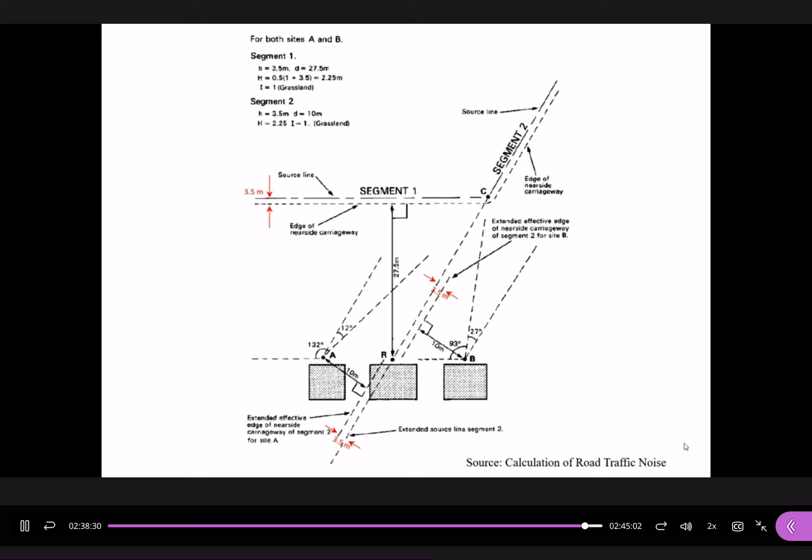And how about this one? This one should be 10 plus 3.5. The relative height of the effective source is 3.5 meters because we assume the effective source is 0.5 meters above ground, and the average height of propagation is 2.25. This is given in the question. And the ground cover value I is equal to 1.

Based on chart number 7, we got -3.6 for segment 1 to A. For segment 2 to A, this is equal to -0.1. The difference is because the direct distance is different for the ground cover corrections. Then you add up together, you get -5.7 for segment 1 to A, and for segment 2 to A it is -0.4. For details, you may check chart number 7, chart number 8, and chart number 9.

And how about the angle facade corrections? Please pay attention here. We do not consider the opposite facade as stated in the question. But for the angle of view, for segment 1 to A it is 132 degrees, for segment 2 to A it is 12 degrees - you may refer to the diagram. For segment 1 to B it is 93 degrees, and segment 2 to B is 27 degrees.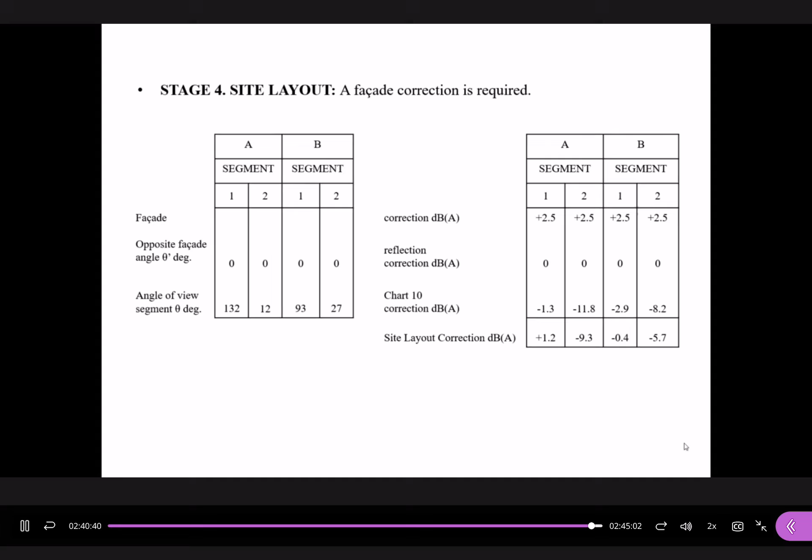So referring to chart number 10, you can find the corresponding values here. This is chart number 10, for the angle of view.

So you get other data for the site layout. How about...

The combined noise level? For the combined noise level, you just consider from stage number 2, stage number 3, stage number 4, and add all of them together. And how to calculate this one? Combined noise level is 64.7 because both segment 1 and segment 2 contribute to the receiver A. So when you want to calculate this value, how to calculate this is 10 log...

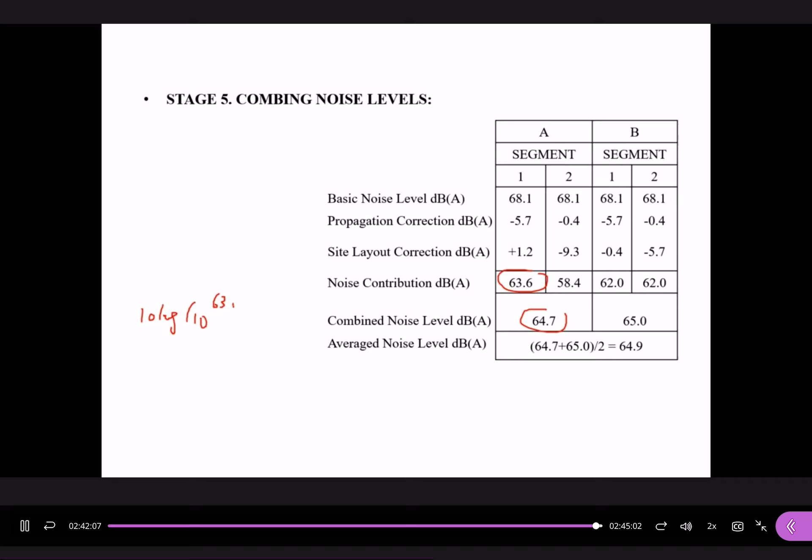This one is 63.6 divided by 10, plus another one is 58.4 divided by 10. Okay, you can get this value.

And the other one for segment B, for receiver B, under segment 1 and segment 2, we got both of them as 62, so the combined level is 65 dBA. This last row here is the average noise level at receiver R, the real receiver - you just take an average for both of them. We can get 64.9 dBA. This is the final result at the reception point R.

Please pay attention, the last procedure is just taking an average for A and B only. But the combined noise level due to segment 1 and 2 to A needs to make use of this equation.

Any problem? For details, you can check the charts in your lecture notes one by one. I will share these solutions with you next Monday. In the last lecture, I will tell you about the examination format.